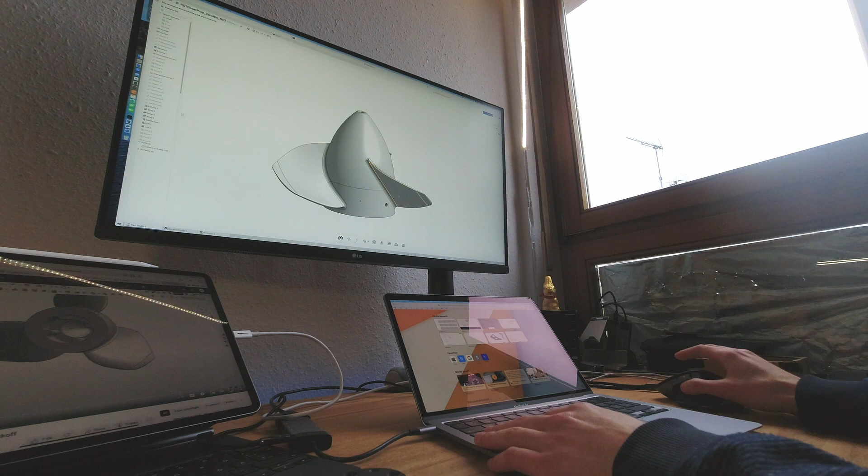I'm not going to use Onshape, but Fusion 360, so I have my own little tricks for propeller design - it's not my first propeller. That's definitely a good thing. I'm just going to watch the video to get some of his tips and ideas, and then I'm going to do it for my propeller.

Okay, for some reason the downloaded step file does not work. So let's just download it again, or I don't know, it's an STL maybe? But yeah, that should be an easy fix.

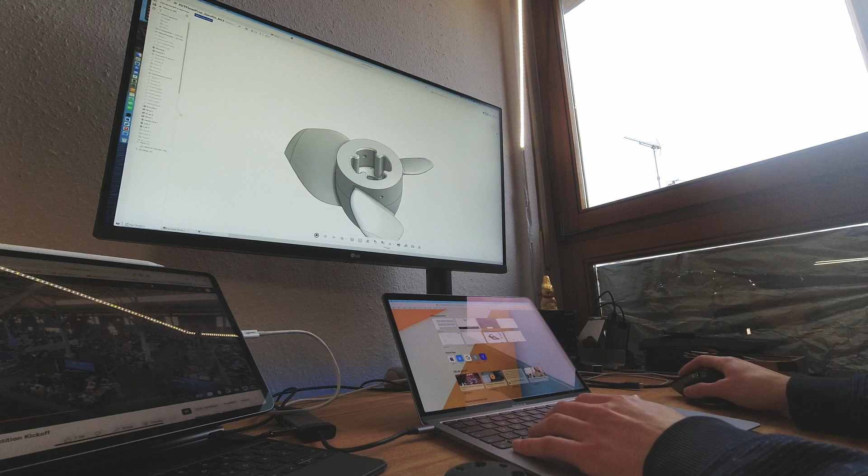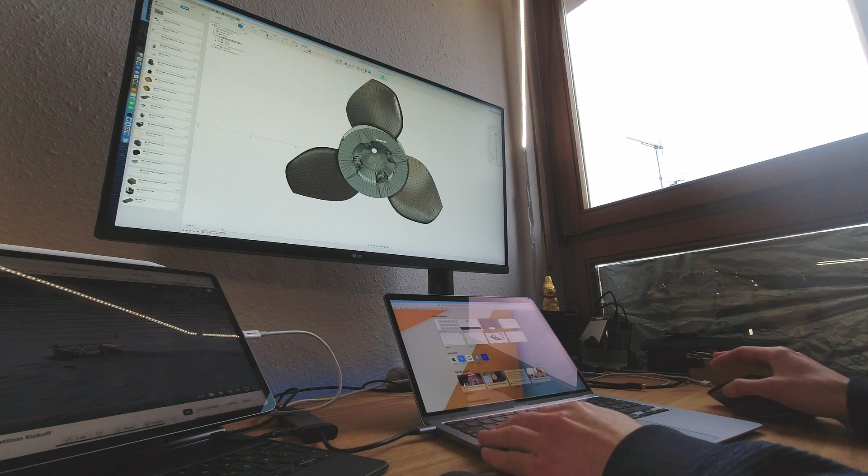Right now I'm just copying the model from rctestflight, or just the rough sketches for his mount especially, and also just the rough size of the blades. Then I'm going to redesign it in Fusion 360 because the step files didn't work.

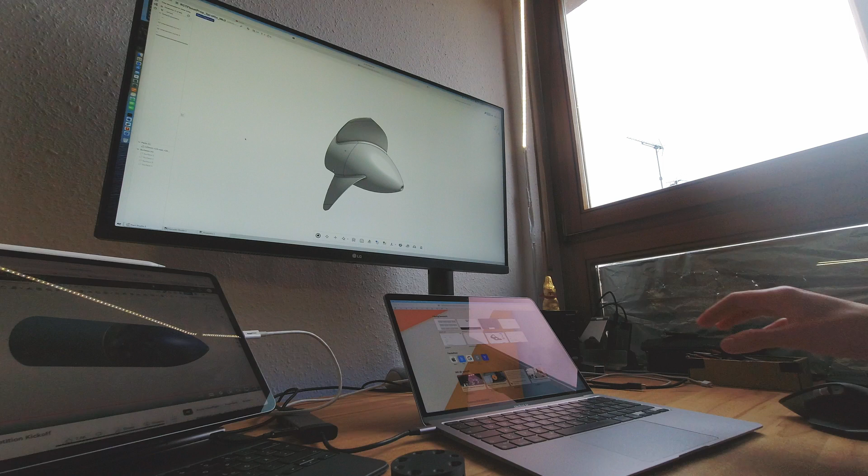I'm mildly confused because rctestflight says he has the components to the structure already in the model, and he also has 4 parts instead of my 1, and 4 surfaces, which are probably used for designing the prop, which doesn't even fit. Also 2 things failed with errors, and this is the original file from him.

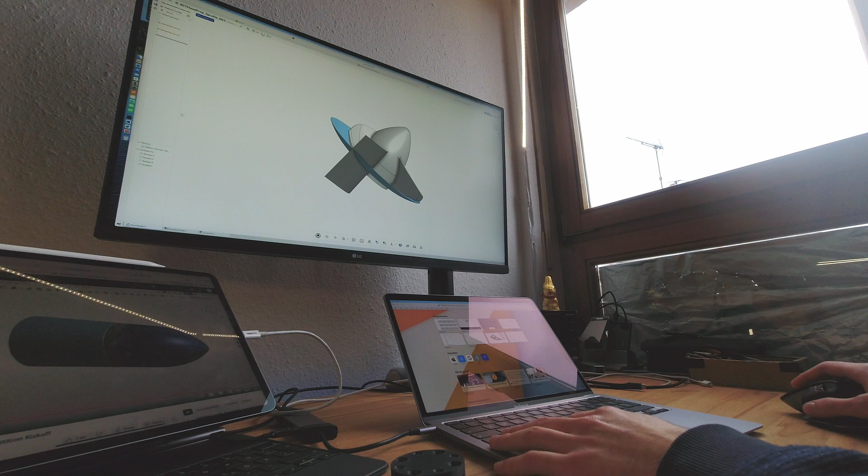Next rule: all the propellers have to use this hub so that I can easily attach them to my motor. If you're using Onshape, then you can just copy this - yeah, I don't have that. There's a variable studio, but that's just the different parameters or values. In the assembly, there's nothing here.

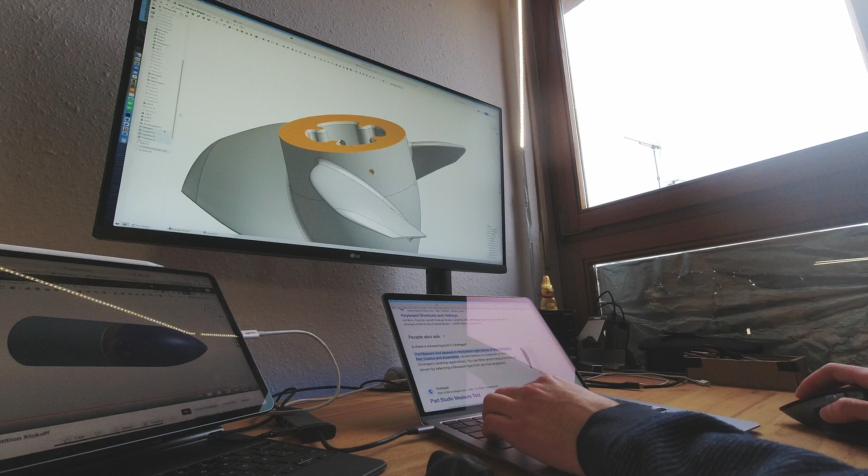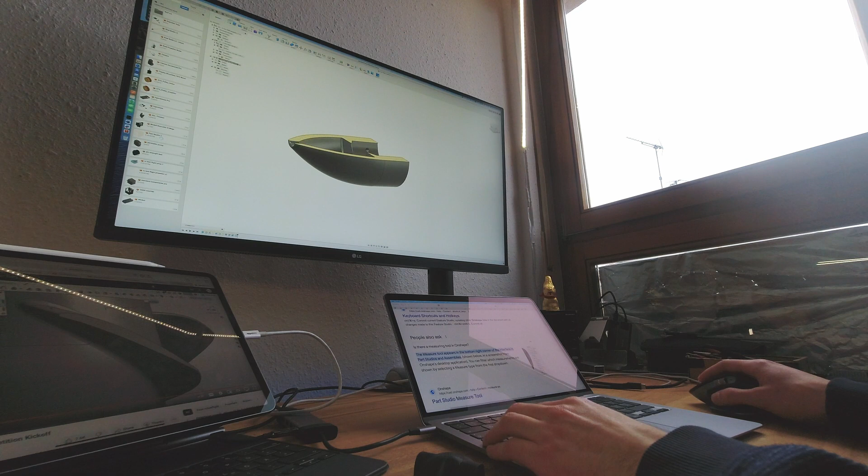Now I basically replicated the main inner housing right here, and it should fit pretty exact. I tested it quite thoroughly and did precise measurements, and now I can add the propellers. Yeah, I must mention...

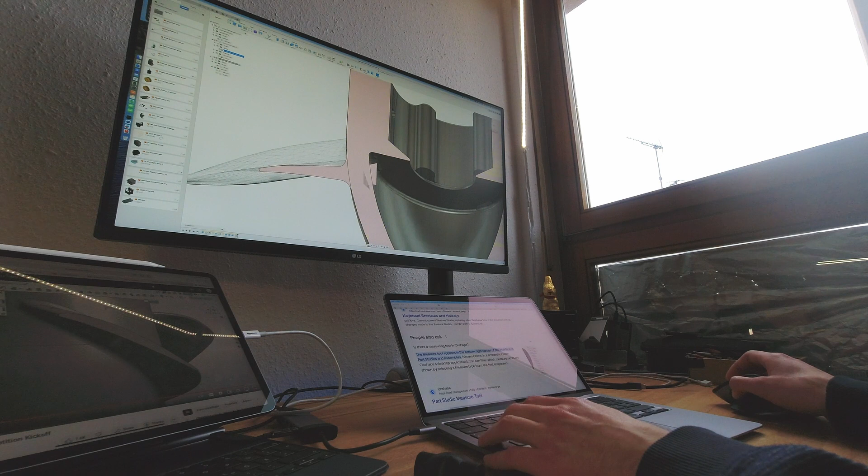rctestflight is adding the props in here as well a little bit. It's not the most professional thing, I would say. I'm not saying I'm the best propeller designer because I'm certainly not - it's like my third propeller I've ever designed.

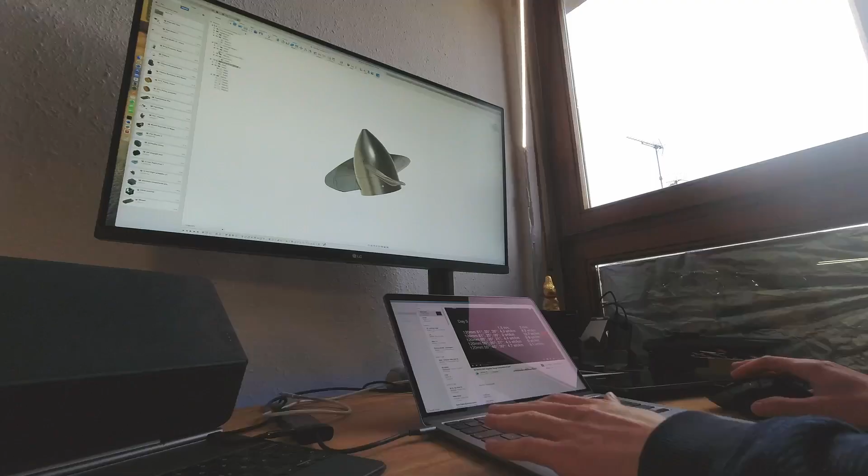But that could be more professional, I'm not gonna lie. Yeah, so this is my prop. So there are 2, you can see rctestflight's propeller. You can see the mesh of it. There are 2 methods to create this propeller, or in general creating a propeller.

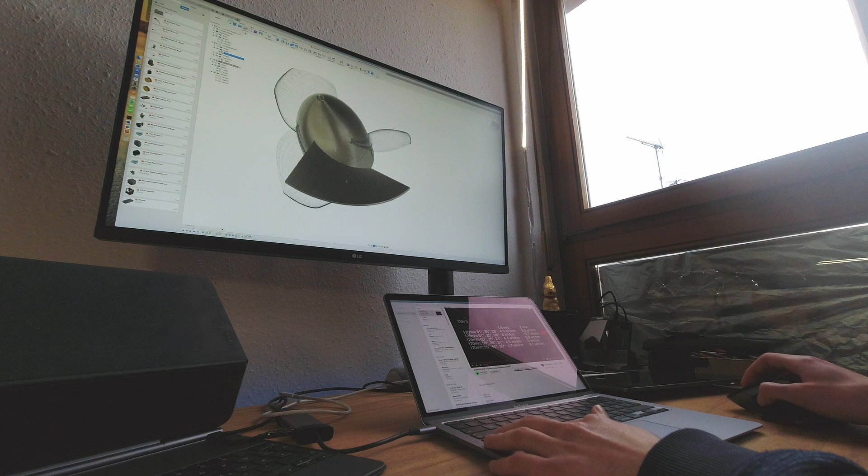Either you use the coil function and then make a huge coil basically, which has the correct pitch but doesn't have an airfoil shape. I always thought this would be a really simple and also good method to make a good propeller, because it's basically like a screw - works pretty fine.

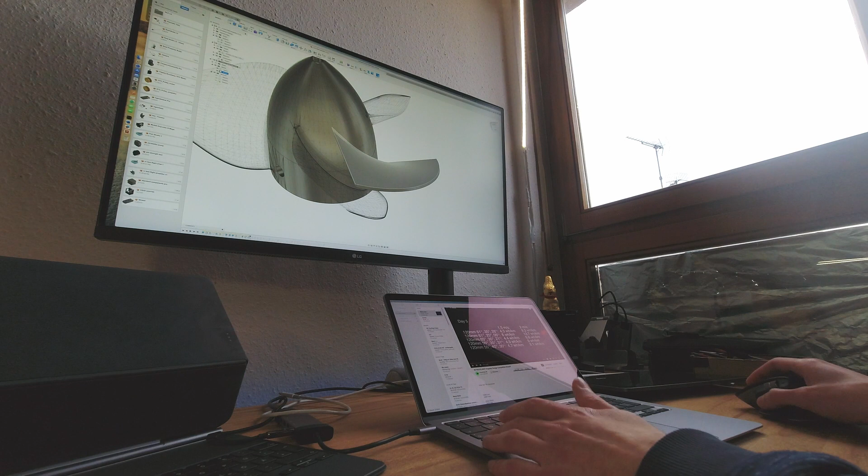But in the real world, we have aerodynamics and we need an airfoil shape. So I'm actually not even sure if what I did is a good prop, but I tried to make it as aerodynamic as possible. The yellow thing is my airfoil and the pink is rctestflight's.

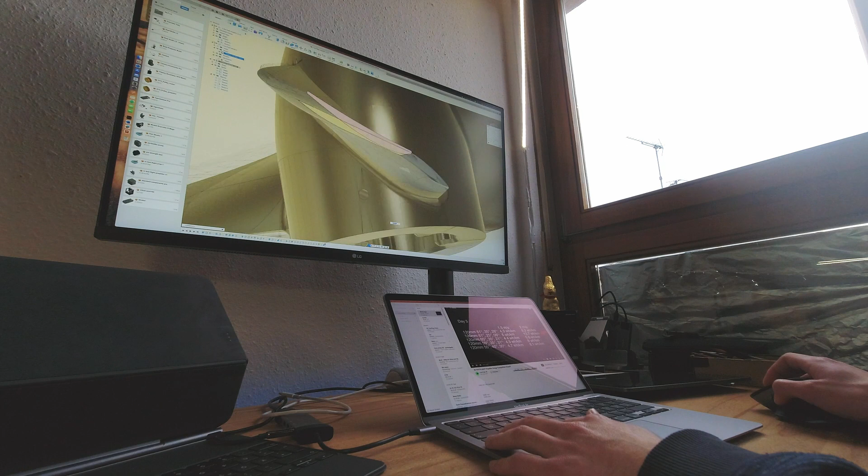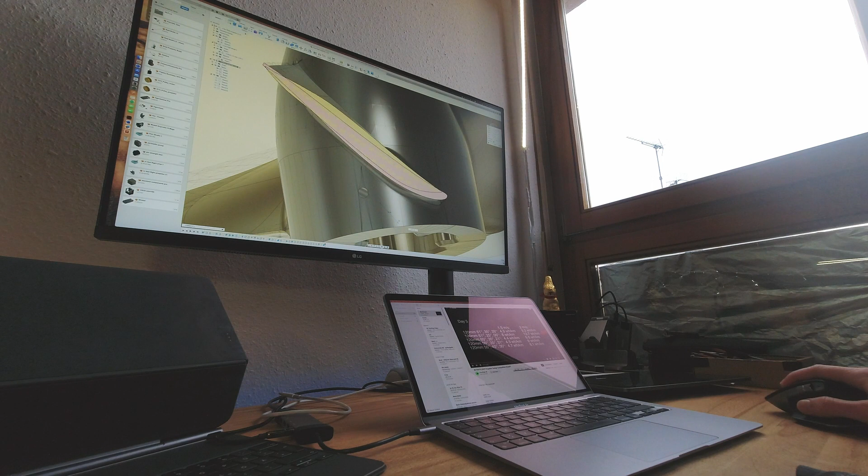And they start off quite similar. His is a little more airfoil shaped, definitely. Mine is quite pointy and more like a drop shape, water drop. The turn is similar, but he has more of the upswing, which I think is good for efficiency.

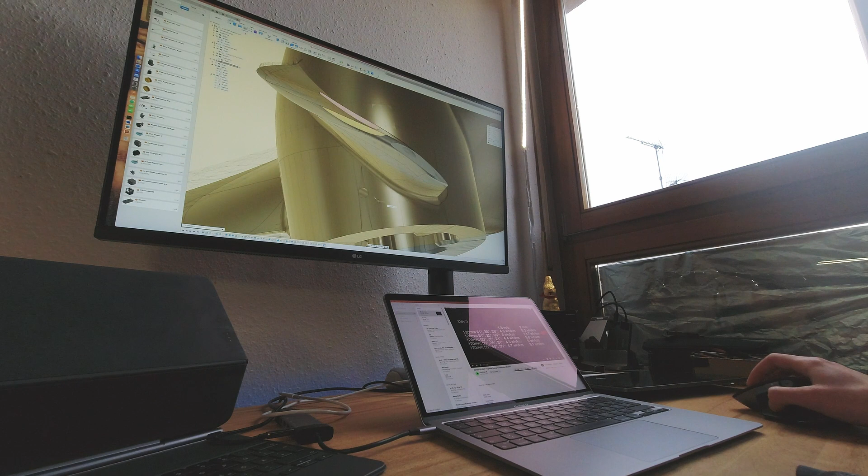And I have a little bit less total pitch in general, I think even from the start, because I think his pitch is a little too strong, but I don't know that much about aerodynamics and stuff, but yeah, it looks cool.

I made it a tiny bit longer, which you can see here, just to get this little bit edge of aerodynamic advantage.

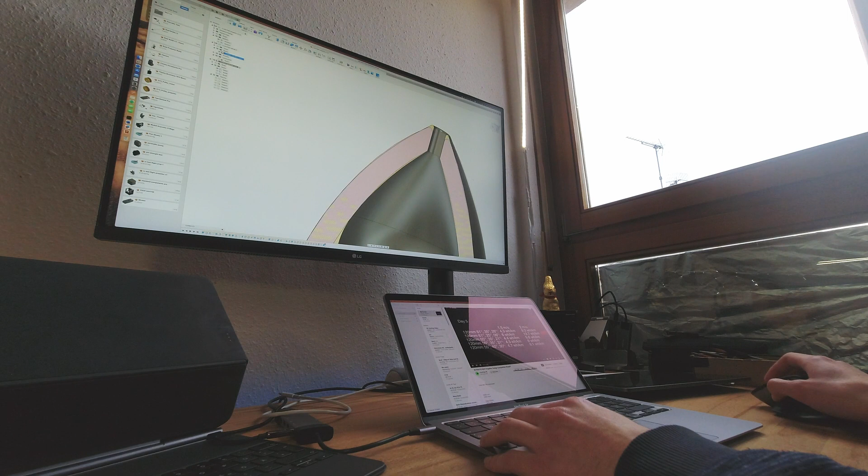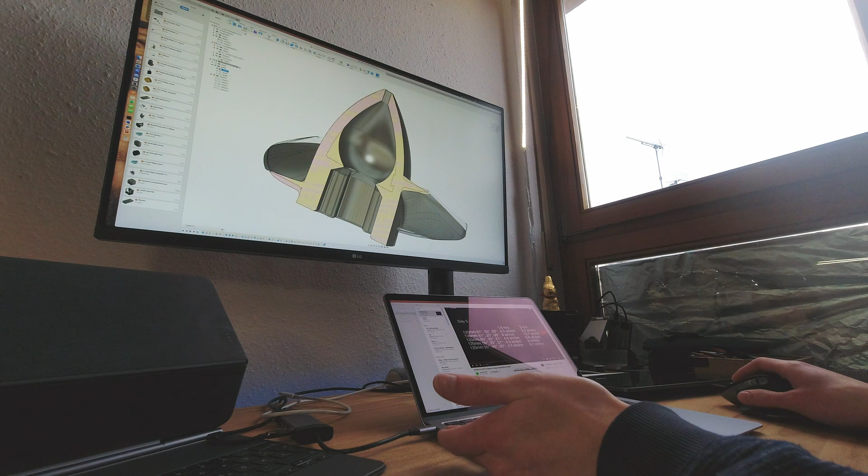I made these fillets as well, because he just has this edge, and I know water shouldn't really get in here, and probably doesn't even matter, but I think it's just weird to have this just air. So of course this also creates a lot of turbulence if water would get in, but I don't know, I'm not a propeller designer.

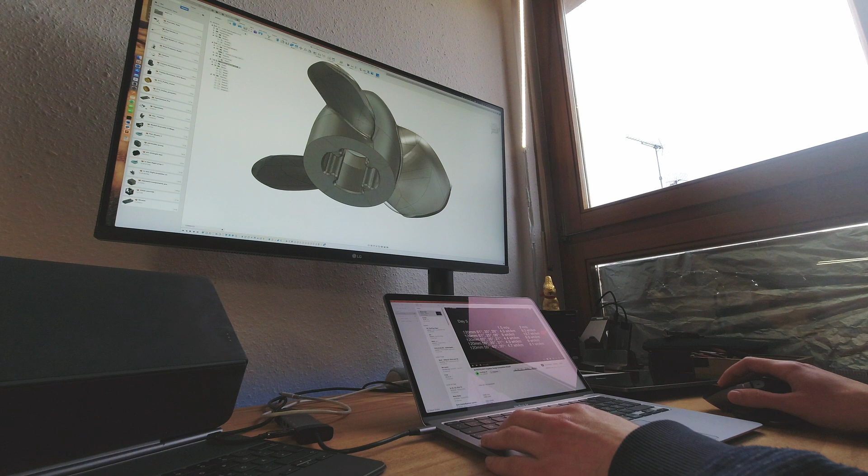And the mounting shape should be very accurate as well - maybe like 1/10 of a millimeter wrong, but you won't notice that. Look at that, that's freaking precise. It's not like I've never printed such stuff. That accuracy is good enough.

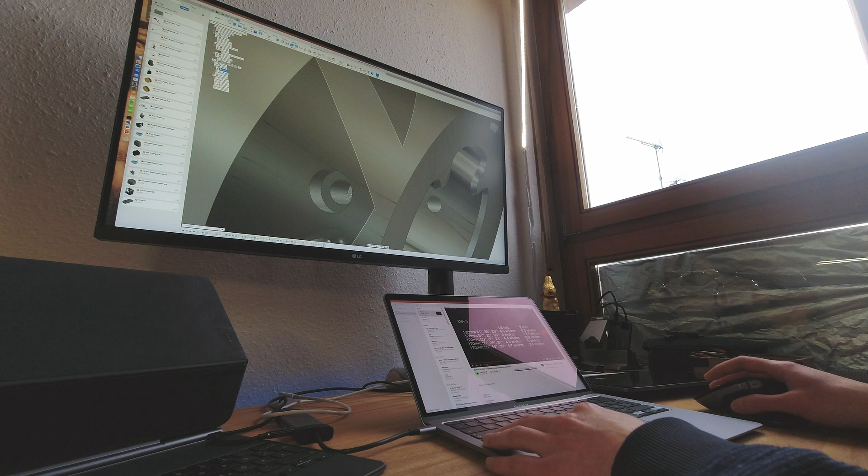So let's see, and there's the submit button. Let's see. Okay, and now he can check it. Let's see if he builds it, but I'm pretty sure it will not, because it's not the best design. But okay.